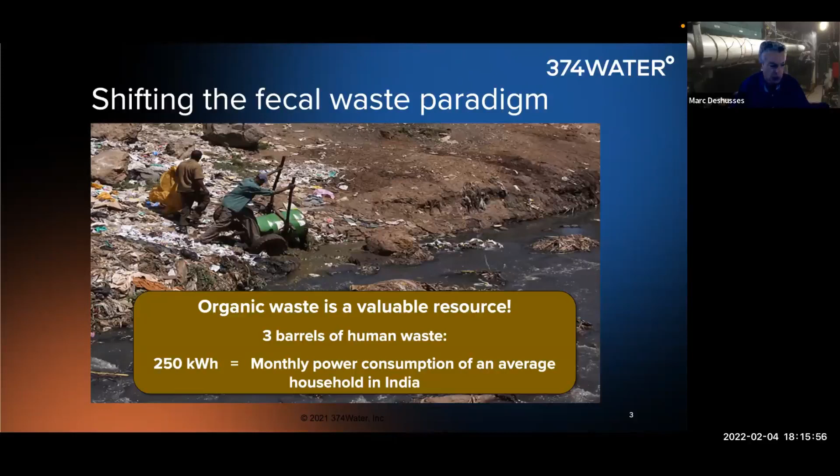Greg, if you go two slides forward, we have here. I'll tell you a little bit about the science, and then show you some of the features of our system, and then focus on global access and what it means.

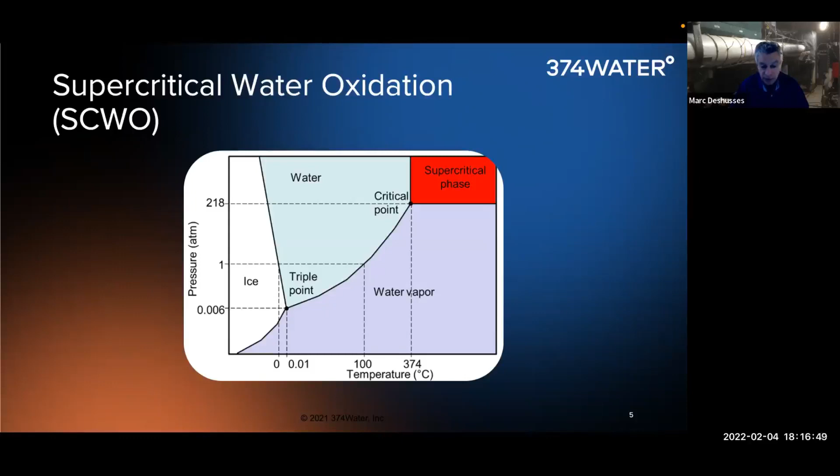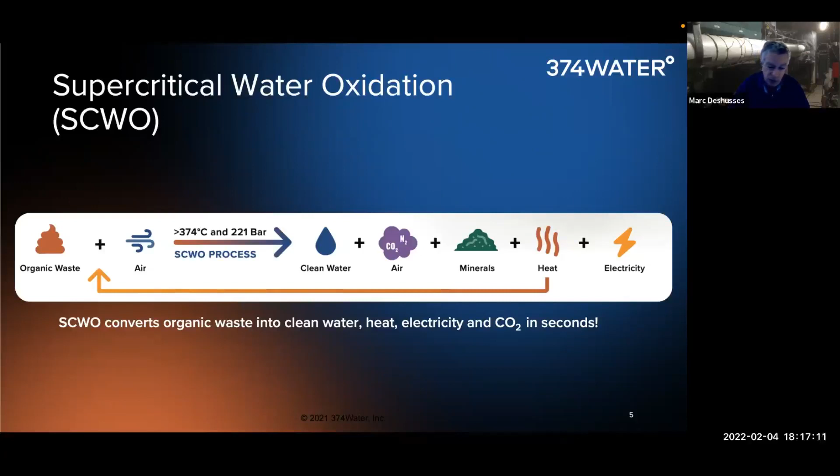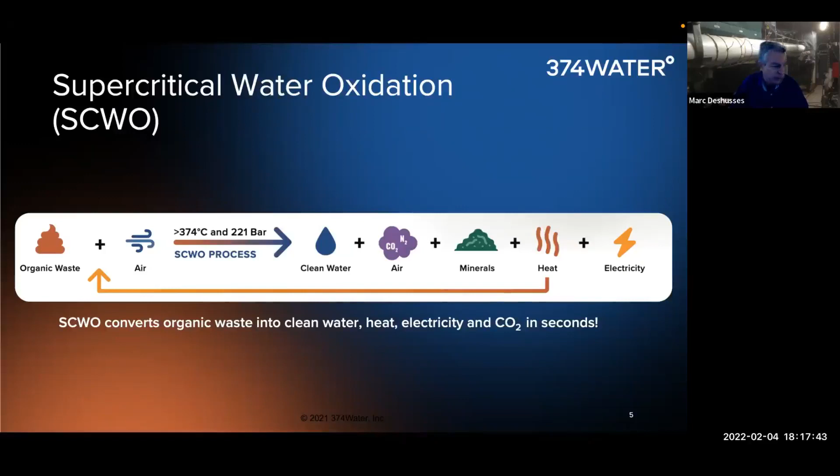So what that means is that when you inject air into organic waste in a slurry that's been brought to supercritical, the following reaction happens: all the organics get oxidized, recovering clean water that can be reused. The carbonaceous materials are converted to CO2. Minerals fall out of solution and are readily available for reuse as fertilizer. Then you recover the heat of reaction, because it's an oxidation, and that energy is generally re-injected into the process to make it continuous. Some of the surplus can be turned into electricity. So that's the gist of the SCWO reaction.

On the next slide is shown how we've engineered it to fit into a box that can take any organic waste, fecal waste, pit latrine content, contaminated water, chemical waste, and others, and turn it into clean water and the elements. If you follow the air, for instance, the ambient air gets compressed into a high pressure compressor, and then it passes through a heat exchanger, the economizer, which recovers the heat of reaction and heats up the air to high temperature.

It's then mixed at the entrance of the reactor with the waste undergoing treatment, and that waste is slightly preheated for energy efficiency in another heat recovery system. In the reactor, the reaction that I was showing earlier occurs, and it happens in a few seconds - we're talking about 4 to 10 seconds for the reaction to occur, and it's extremely fast because of the conditions I mentioned earlier. Then the heat is recovered.

After the heat exchanger, we have a phase separation. This is where the permanent gases and some vapors are expanded in a heat recovery and energy recovery system, resulting in power used in the system, the vented gas, and distilled water quality. Here the water is condensed and is of very high quality.

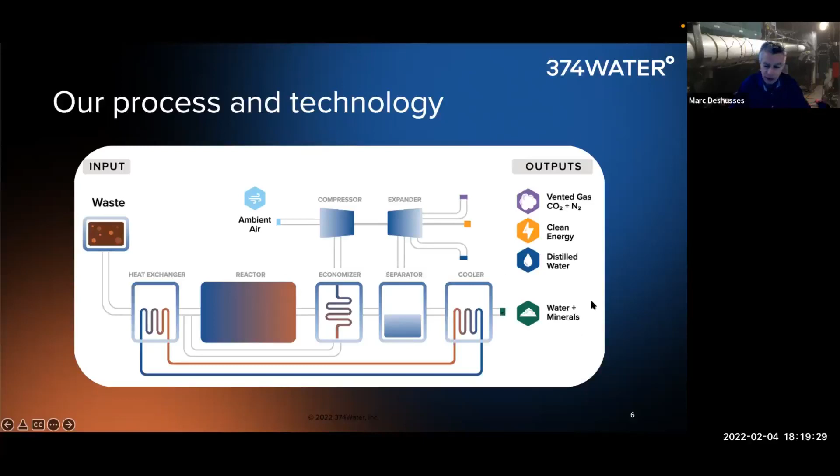The other stream from the separator is the minerals I was mentioning earlier, along with some water, and that's fit for recovery. On the next slide, you see a picture of what we call the Nix One System.

This is the original prototype built with funding from the Gates Foundation. We received funding to demonstrate this technology, to de-risk it, and bring it to a stage where it can be commercialized—about $5 million from the Gates Foundation, and about $1 million from other agencies. The characteristics of this system are that it's very compact.

This is a 20-foot container that can treat the waste of 1,000 people, one wet ton per day. It's a continuous process and produces clean water. We'll show you some pictures or videos later. There's no odor with water, wastewater, or fecal sludge.

Odor is a big concern, but there's none here, so you can place a unit like that in a neighborhood. It also destroys all organic chemicals. There are no organics that we've fed to the system that haven't been destroyed.

Mary mentioned PFAS, PCBs, emerging contaminants—they all get destroyed and mineralized. You can do this with multiple wastes mixed together, like fecal waste plus chemical waste. Everything is disinfected because of the heat, and you can do it with waste without dewatering or drying.

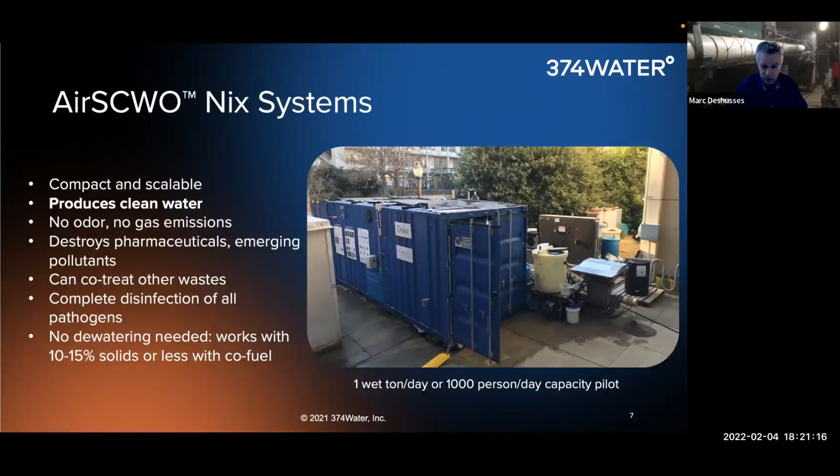On the next slides, you see more pictures of the system and its interior—it's all industrial equipment. Some further attributes: the units are small, and you can locate them on the premises, embedding them at the source.

By the way, my background is inside the unit as well. The pictures you see here are from before the thermal insulation was placed.

Very relevant for the audience today is to realize that we recover and can reuse water. We can treat fecal waste, as mentioned, but also recover energy from it.

We recover nutrients too. In today's context, India is going through a huge revolution initiated by the Swachh Bharat mission, along with stringent requirements placed on wastewater treatment. There's huge demand for toilets and for small scale systems, and we think this solution has a role to play in decentralized units.

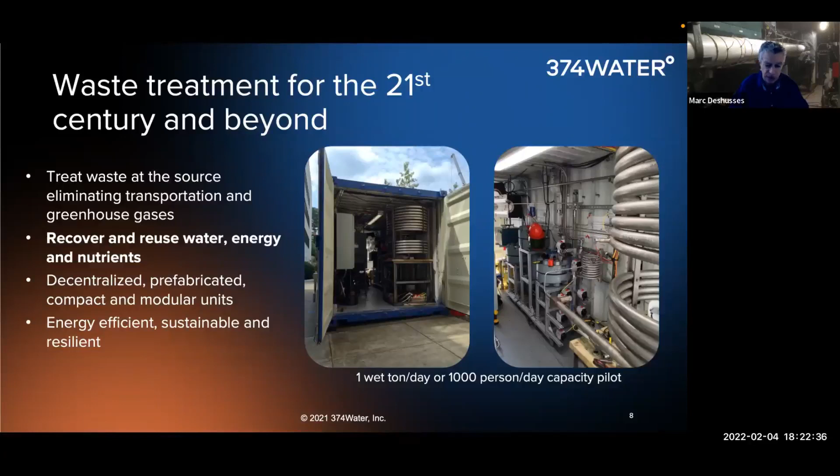The process is very scalable, so it can fit multiple needs, and it's very energy efficient. As we started talking about sustainability, Doug mentioned the sustainable development goals—I think this is very relevant to that.

Next slide, please. In the video, we'll show the ability of the unit to treat a variety of waste. We've done a lot of work on biosolids and fecal sludge, but this particular video shows us adding microplastics just to demonstrate that we can treat ground plastics.

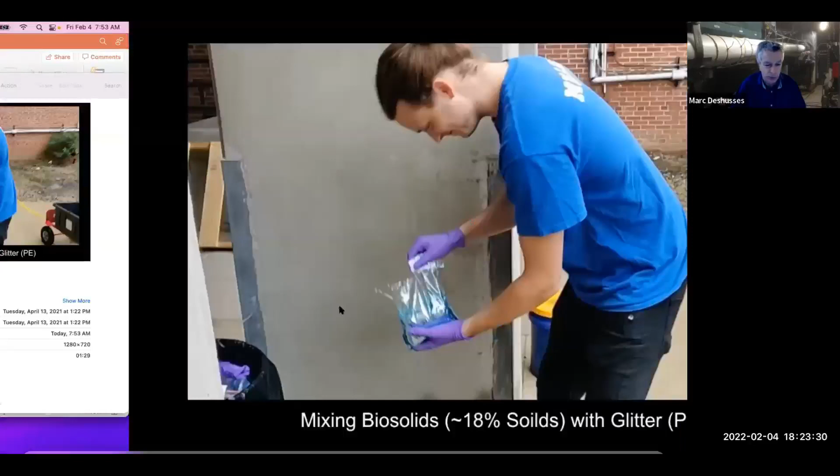We can also treat waste oil—that's the gist of this video. I'm going to take away the music in the background. So what we have here is biosolids at the bottom, and then we're adding plastic.

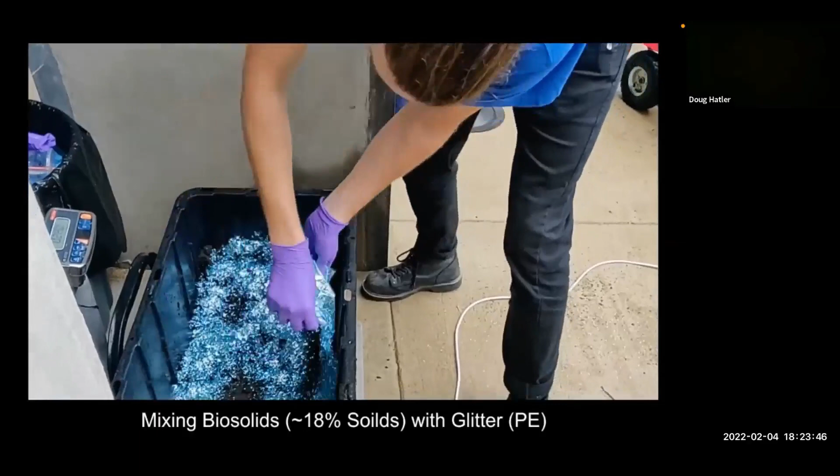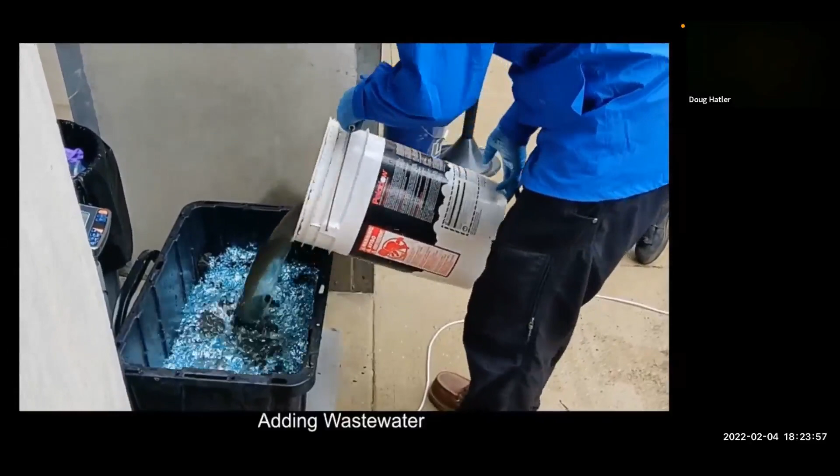The plastic isn't a necessary feedstock—it's just added to demonstrate a blended waste of biosolids and wastewater, representing microplastics. So we're showing that we can treat plastics, and then we're going to add some fats, oils, and greases.

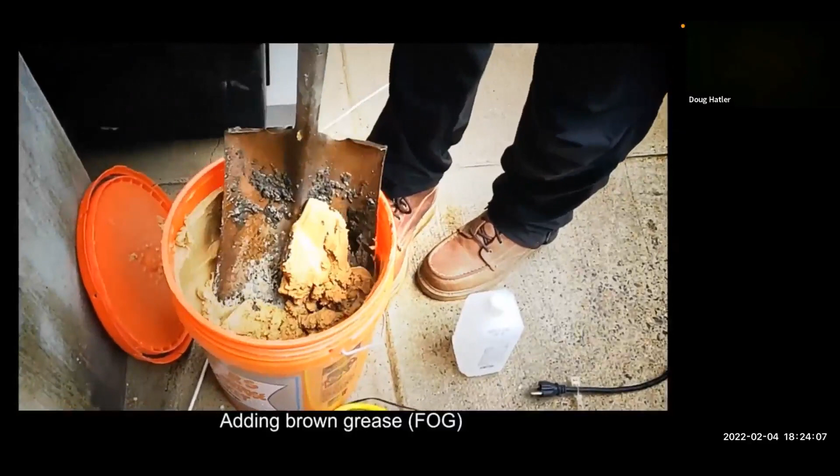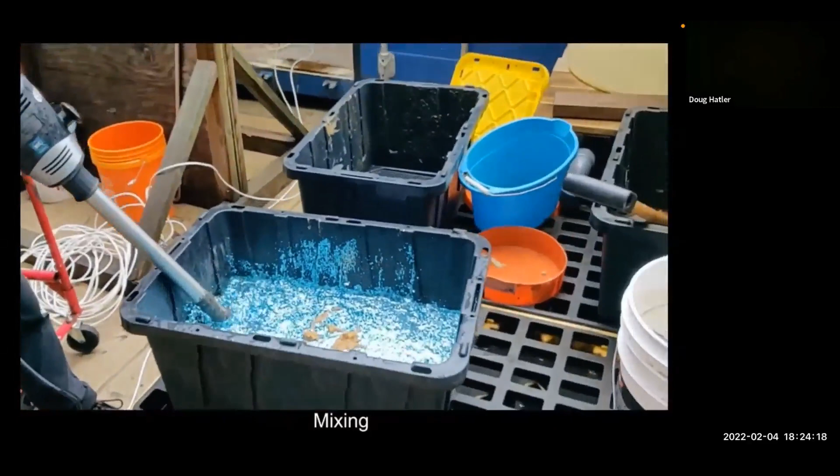This is why we have cholesterol treatment medications in the world. That's going to go into the Nyx One—this is at Duke University, a pilot system that 374 Water uses under a sponsored research agreement for treatability testing.

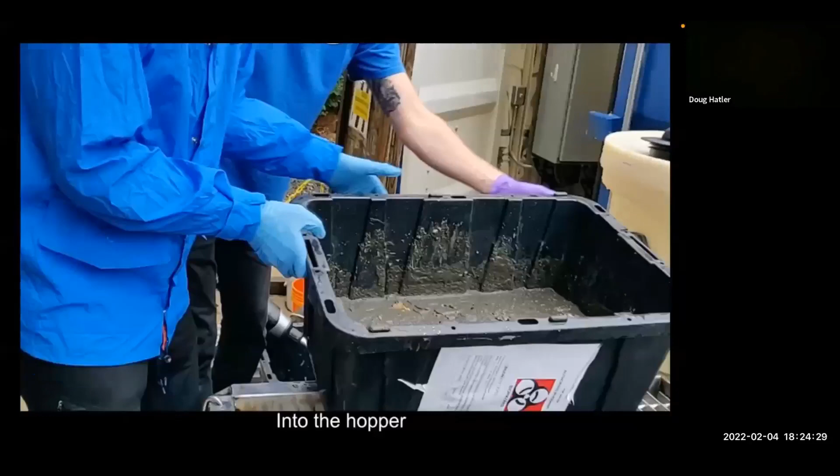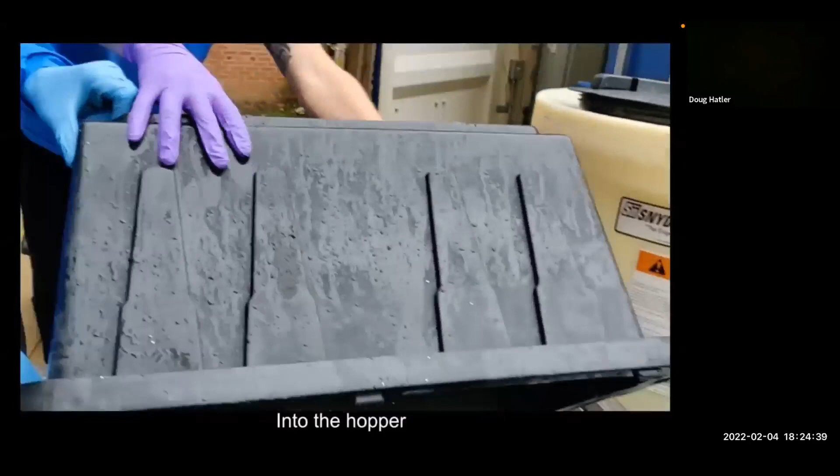What they're doing here is making a uniform, consistent feedstock that's about 12 to 15% total solids. They're pouring it into a feed hopper, where it will go from a low pressure pump into a high pressure piston displacement pump, which then moves it through the reactor—that's the actual material going into the system itself.

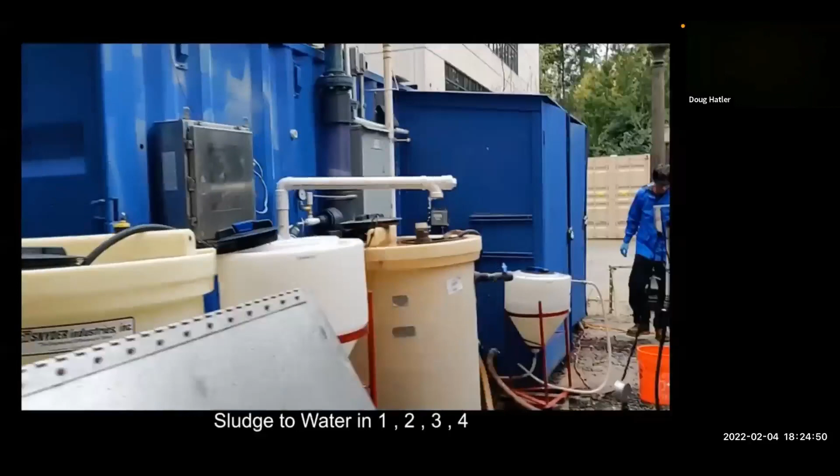What you're going to see is the Nix 1, the blue container—a 20-foot cargo container. And voila, that's what comes out, minus the gases that are released, but that's it.

All those solids, 99.9 or higher percent removal of volatile solids. COD reduction goes from 160,000 parts per million or 220,000 parts per million down to about 118 parts per million.

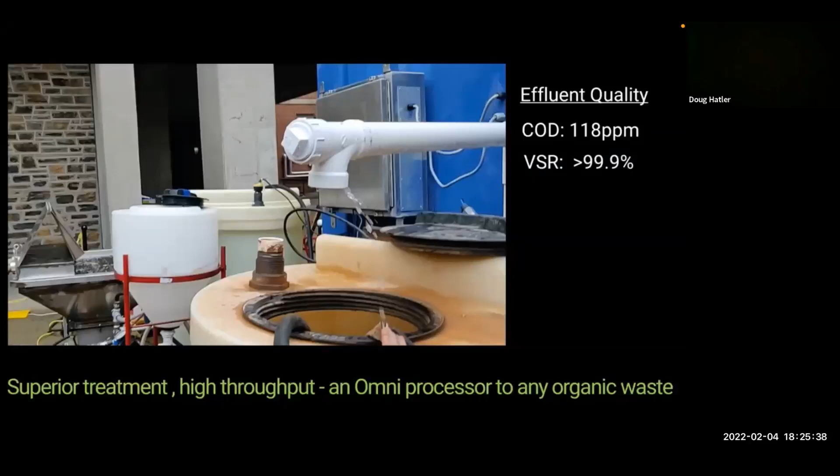Any organics that might be in there, microplastics, drugs, if you did have PFAS, anything else that's in there is generally going to be mineralized to CO2 and H2O. Any inorganics there are going to be oxidized to the highest oxidation state of whatever else is in there. They may form precipitates with other compounds, or they may just be in an ionic state, but that's it. So that's the idea behind our solution.

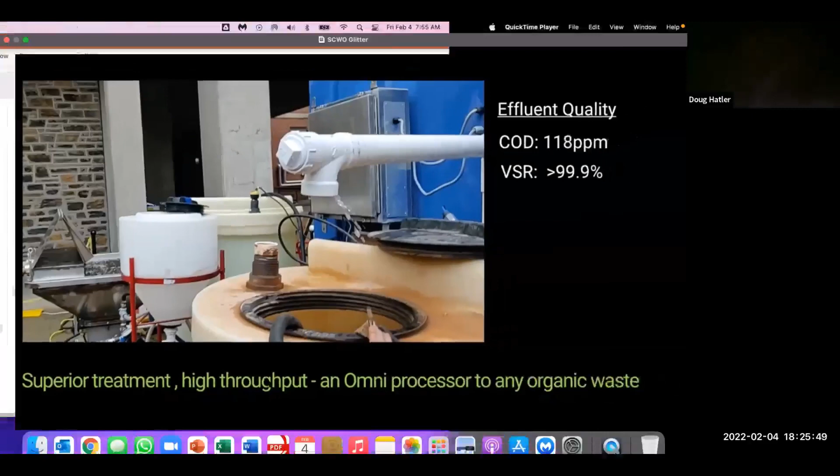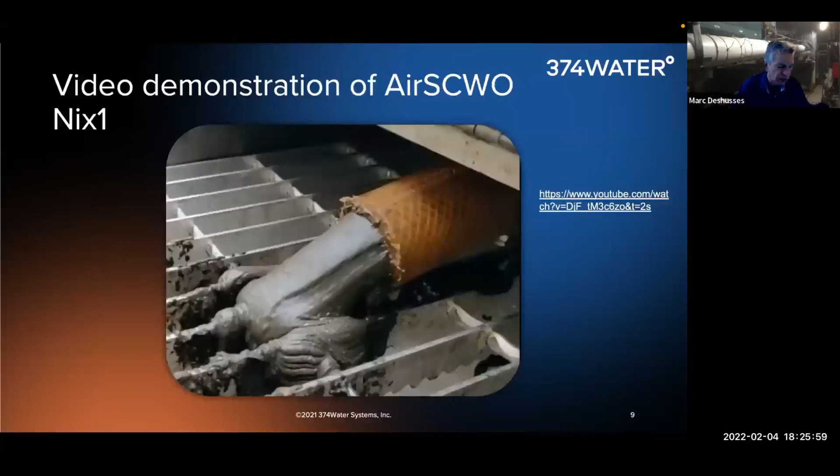So now what I'm going to do is go back to the slide presentation. I think at this point, why don't we stop, Marc, and see where we are. Yeah, let's stop and take a question if there's any about the technology. Let's get to the next slide, next two slides, and then we can take questions.

Great, get on the slide that shows the minerals right after the video. Is this what you want to show? Here's more, just again showing the diversity of things that go in and how clean what comes out is. You see a picture of the minerals, and those contain all the phosphorus.

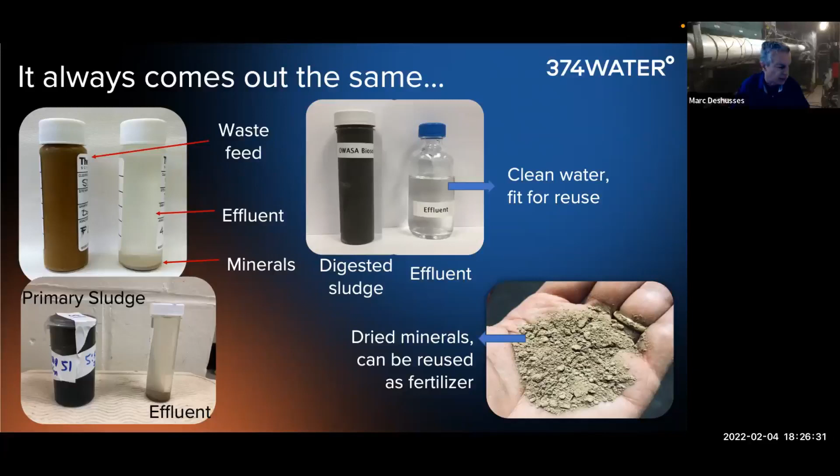Also, on the next slide, you have some attributes of the water effluent. We're coming in with very high concentrations, that's the feature required for energy efficiency, either as COD or as a solids content, very high nitrogen, phosphorus, and then what comes out is the water, very clean.

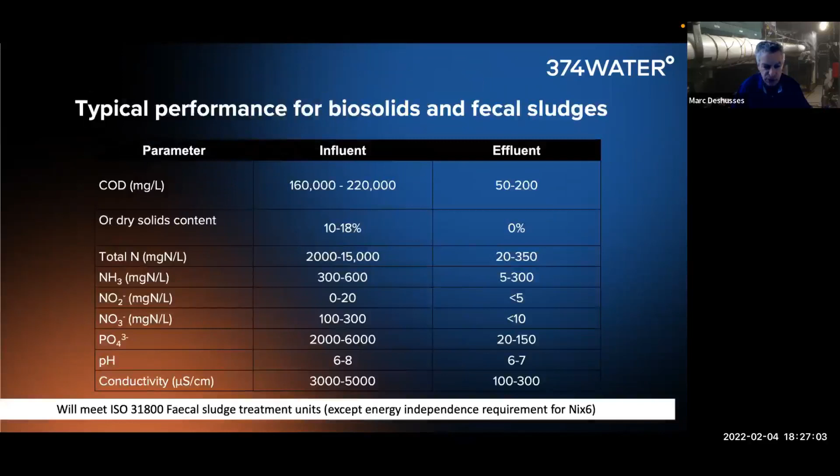Maybe indeed, as Doug said, before we get into telling you about our global access program and our plans, let's take questions on the tech. Yeah, so we'll close out the tech and open it up.

Right now, what you'll see over there in the dotted line is the Nix 1 unit, which is the pilot system that sits at Duke University. We at 374 Water are currently in the process of manufacturing two Nix 6 units. Those are 6 wet tons per day, approximately 6,000 human individuals population. The first unit is going to Orange County Sanitation District in Fountain Valley, California for a demonstration project.

They will be treating primary sludge mixed with concentrated thickened sludge. We will be putting that combined material, which has about a 4 to 7% total solids content, through a dewatering unit where we will put it through a screw press, and then thicken it up to about 12 to 15%, and then it'll go through the Nix 6 system, where we will treat it with the AirSCWO process.

What will come out will be what we talked about earlier. We'll have a water stream that's distilled water. Some of that distilled water will be reused in cooling and providing water into some of the equipment. What's left will be mixed with the water and mineral solution that comes out of the reactor itself. We'll be sampling the minerals to see what the mineral content is, to determine if we can valorize the minerals, as Marc said, as a fertilizer.

Then we are at the drawing boards right now on our Nix 30 unit, which is a 5 times scale up, so that's 30 wet tons per day. That would correspond to the solids from about an 8 to 10 million gallon per day plant. And then there's a Nix 200, which is 200 wet tons per day, which would take you up to about a 30 million gallon per day wastewater treatment plant, or the solids from the equivalent.

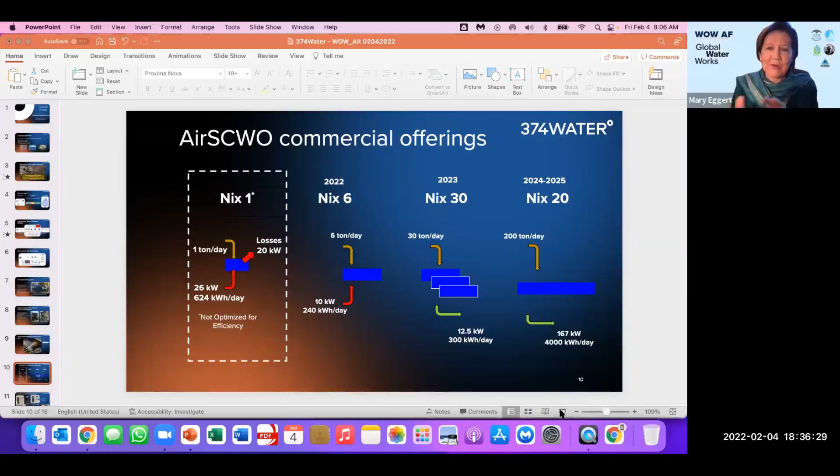It's so interesting to look at the many different revenue streams and the ways to cost-benefit this, because you have the transport and tanking of solids off of a property, and you mentioned the number of tons — but have you planned, or how, when you talk about generating revenue from some of these minerals, or a polishing process to extract things that could be useful, I know that creates revenue streams. Are you involved, or how does the utility capture those revenues?

Doug, if you could talk about your vision right now.

So what we're going to do in the OC San project, and what we're doing with many of the projects, is what we call controlled studies. Because we're moving this into a 6x scale-up and out into commercial application, we want to understand what the feedstocks are, what the effluent is, the concentration and composition of the feedstock and the effluent, including what the minerals are.

And we will also be sampling off-gases, because in the US we have to satisfy regulators that this does or does not need an air permit, and if it does, what are the parameters that might be of concern. So we're working with a consulting engineering firm as a partner, and they're going to be doing the monitoring.

One of the things we did do is put in a translucent cone-bottom tank for the effluent, so we can put the waste in there and pull mineral samples. Depending on what's in there, we'll be able to look — we've talked with a couple of universities doing work on recovery of minerals like this. So we do want to see if those streams can be valorized.

And then in terms of the water that comes out, it can be used back in the plant. Depending on the use, that will determine what polishing you might need. Unfortunately in the US water is too cheap, but there's still an operational cost offset if you're able to reuse and recycle the water.

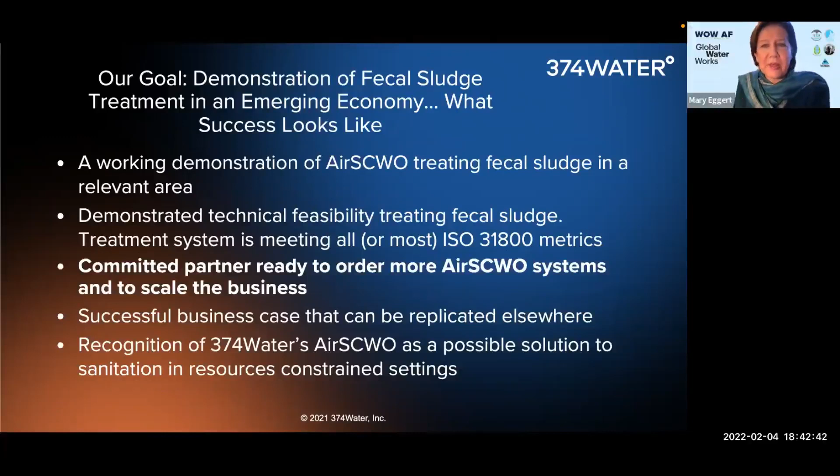Is it necessary to achieve drinking water quality? What would be the impact on technology? And I think the guys discussed this in terms of the energy cost. If one is looking at treating to discharge standards, maybe Marc, you could answer that.

Yeah, I'll take that. So we meet the most discharge standards, from a COD, organic nitrogen standpoint. I presented that just to highlight it. And on the energy, so you can look at this as we're going to meet the discharge standard. On the energy, this slide's been up for a while. What you see is that the Nix 6 is actually consuming a little bit of power, not much, but with the economies of scale and better equipment available at greater size, greater scale, the Nix 30 can actually run autonomously just on the waste that is embedded, that drum that I was showing at the very beginning of the presentation, and so is the Nix 200. So it's very energy efficient because it was engineered and developed with that intention.

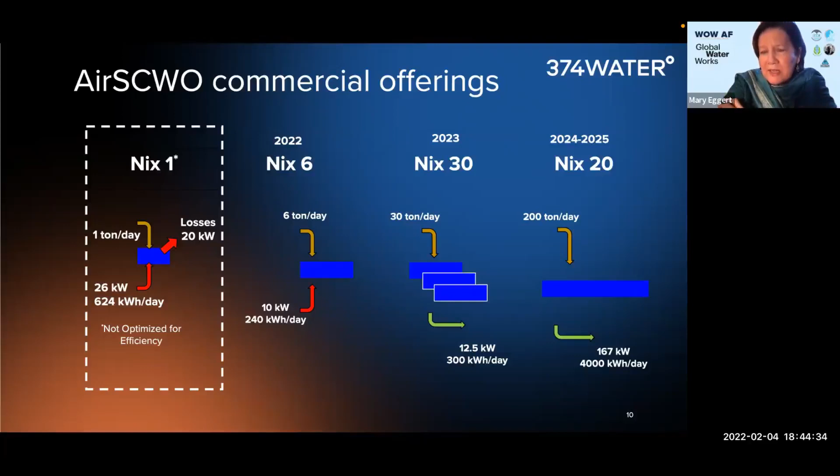Great. And I encountered your team at a zero waste discussion, a place where we were talking about how do we meet these EHS, SDG goals of the UN, and move towards zero waste. I'm thinking about like CAFOs or those very large farm operations, or places where they are limited in what they can discharge in order to add a new plant or facility. Marc, if you could talk about achieving a vision for zero waste, it seems like that's probably the prime motivator for this supercritical water oxidation. Is there a CAFO or a commercial entity that you had in mind as the ideal purchaser that would want to cap the waste element of their operations?

There are many, for those who are not aware of what CAFOs are—confined animal feeding operations. A lot of industrial farms in the US are like that. Animal farms are prime targets, and so are many other applications we're pursuing, because they don't flush the toilets at animal farms as often, so the waste already comes in more concentrated ways. But it's a complex market as well.

Doug mentioned some of the markets we're targeting: chemical waste, fecal sludge, biosolids. There are many applications. One big one currently in the US is the market of emerging contaminants driven by fluorinated compounds called PFAS. We know there are many pollution aspects as well in India, in surface and groundwater. So this is a quick answer to your question.

As we move into this discussion of application and potential fit within India, let me ask one last time: is there any more technology or understanding of our AirSCWO or anything else about the actual units themselves? Because as we move into Mark's discussion about the Global Access Program, you'll be able to provide us valuable feedback on whether we're satisfying a true need in a way that can reach your markets, or whether we need to adjust our trajectory.

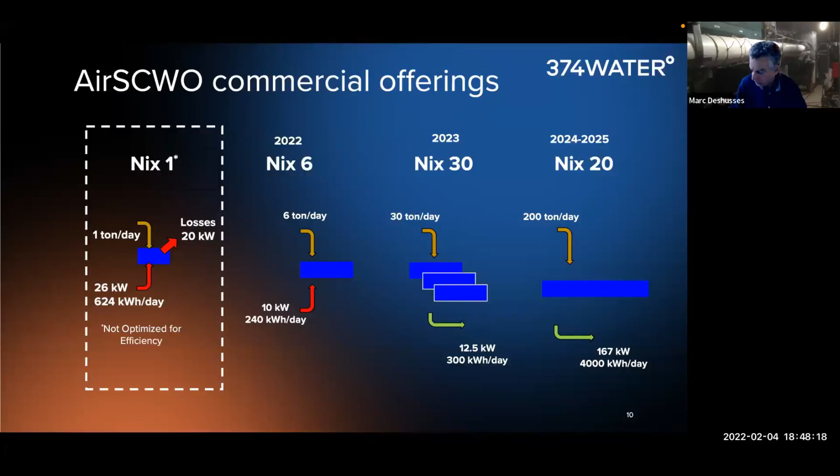Yeah, so when you talk about the Nix 6, the 6-ton-per-day unit, most of the equipment is inside a 40-foot cargo container, and then there's some ancillary equipment that expands the footprint a little bit. But you're talking, I think we've estimated, anywhere from 1,000 to 1,200 square feet. And I'm sorry I'm using US units—it's been a while since I've done international business, so I've gotten rusty on making quick conversions in my head. Oh no, that's perfectly okay. Yeah, so it is a relatively small footprint.

So from a cost standpoint, the manufacturer's suggested retail price—and this is not necessarily the final price—but a capital purchase price is roughly 2.4 million for the Nix 6 and roughly about 5 million for the Nix 30. We estimate the operations and maintenance costs to be about 5% of the capital cost per year. That assumes about 1 full-time equivalent, and includes the cost of electricity for startup, shutdown, and operation, parts, and normal maintenance of the system.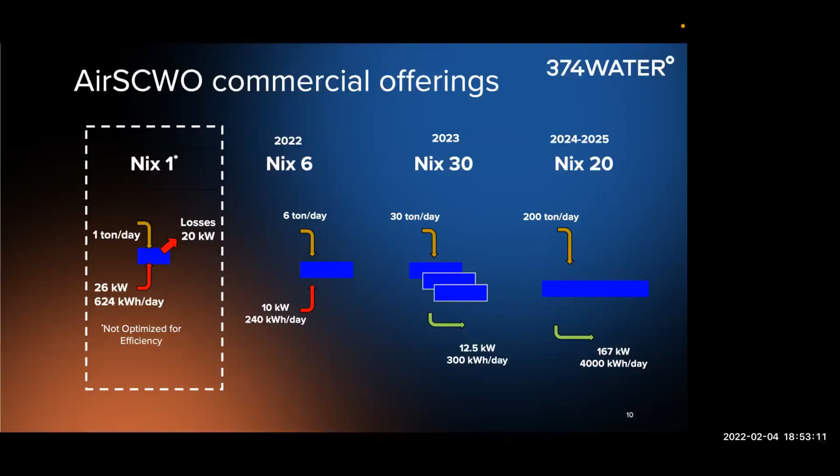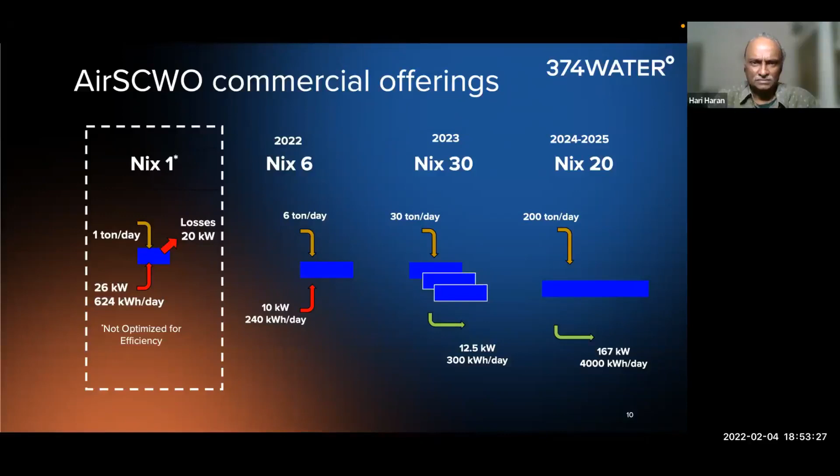So tell us, is that a lot, is that a significant cost for this, based on the lens through India? Sanjay or Chandra, one of you. Swaminathan had some comments on this too. Let me first respond. The question he's asking, being very transparent, is: he's saying, look, I don't understand what your economic scenarios are in India. If you can give me an idea of the prices, we are willing to see what we can do to look at it and recalibrate ourselves. In effect, that's what Doug was saying.

Recently, we have started discussions with the public utility services in Hyderabad to manage fecal sludge flowing, to stop it flowing into the Musi River, which is highly polluted at the moment. We are probably having another meeting with them coming week. But everything, sir, as you know, in India the pricing cost, it's a very cost sensitive market, so we'll have to really work out the commercials and the social benefits to see the viability of its applications in India.

More so, it should be where the quantities are large. Maybe we can get better output, because local technologies, we talk in terms of maybe a few thousand dollars for a 10 to 20 KLD sewage treatment plant. That's how it works out. So definitely, but this system on a larger scale, if it can help save our water bodies, which is a major issue in India, we would definitely like to work out on that.

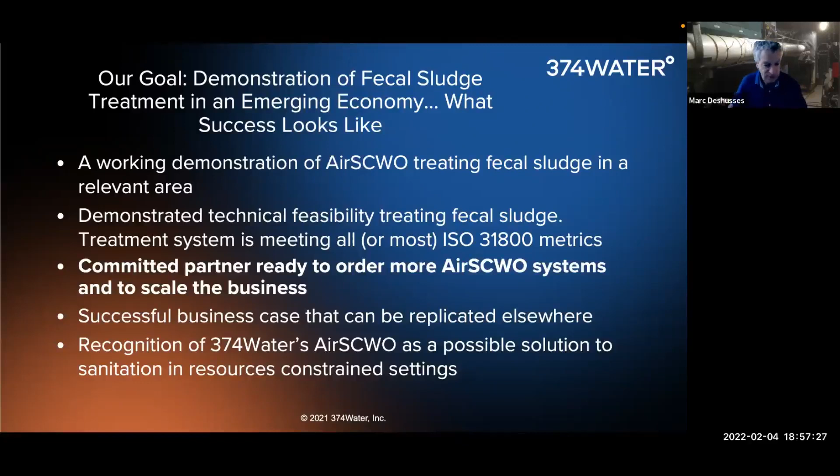So on the next slide, just a little bit showing you what the master plan is. Doug, if you could advance to the next slide. Doug, can you switch to the next slide? Okay, Marc, are you looking for me to advance? Yeah, next slide please.

That's an overview of our plan for this demonstration, working with a partner in India or another emerging economy who has the credentials, the guts, and the vision to work with us to put a unit and develop it into a fruitful business, so that we can do good for society and they can be a profitable business.

So that's the selection of the commercial partner, which is on the left. There's no question we'll need to work with government and have a tight, friendly and fruitful relationship in advocacy with government. We will need funding, and we're well positioned. We have started pitching, and we have great connections with the Gates Foundation, but also with the World Bank and others. We're looking to launch this demonstration soon.

For a duration of about 2 to 3 years, because it will take time to put the unit on the premises, but also train the partners and local operators, and then build a model that can go to scale. Certainly cost is an issue, but there are cultural aspects as well, and technical demonstration. So that's, in a nutshell, the overview of our plan.

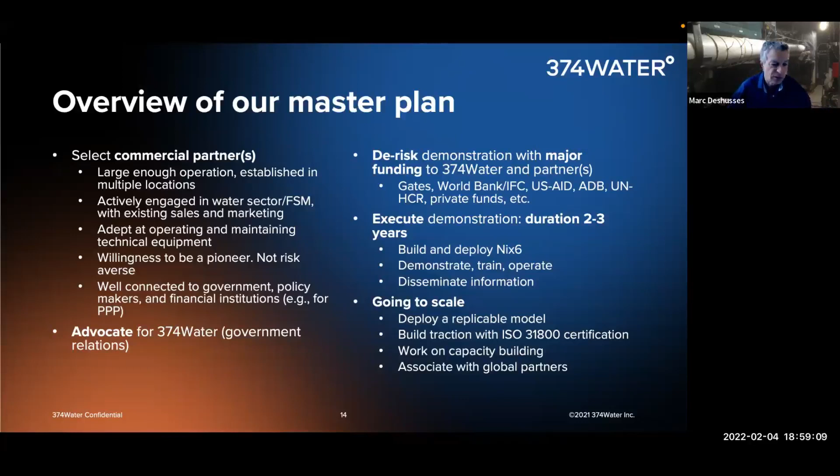Again, I want to put out a call here for those of you who recognize yourselves as a potential partner in any capacity to reach out to us. And with that, I will...

Marc, I'd like to also mention that we have had some contact from some industrial entities in India. We are in conversations with Aarti Industries for some of their industrial wastes and wastewaters. We've also talked with Dr. Reddy. So we have had some inquiries from some industrial corporate entities within India that we're having discussions with.

So we have both the private and the public approach. Because whether it's a commercial application or a public WASH application, the key thing is to find partners and establish a presence to see if we can make this work within India. Then we would take that model to other emerging countries as well to provide the same benefits.

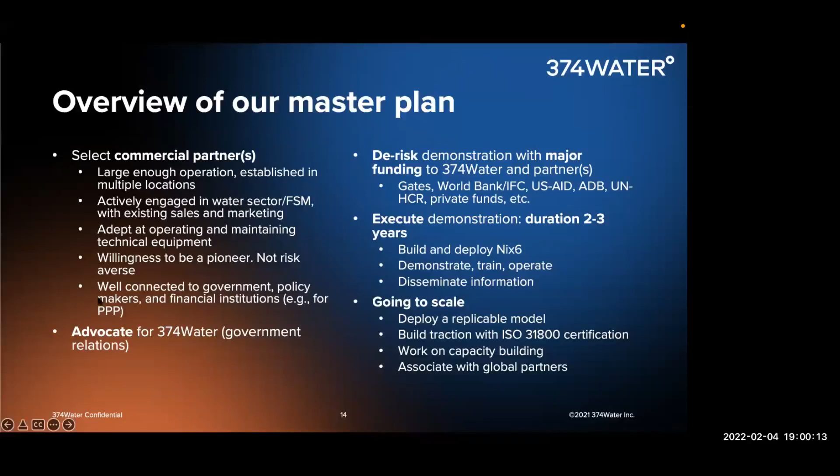Got that, Doug. Rana, you've raised your hand for a while, would you want to speak? We're done, we can finish up with questions at this point. Will you want to speak please? Rana, do you want to speak? You raised your hand. Okay, MD Rana? No? Yeah, he's yes. Yes please, here he is. Can I come in? Yes please. Can I come in? Yes, we can hear you, sir.

Yeah, I'm from Gujarat. Good evening. Good evening, good morning, good afternoon. I have been in difficult water treatment business for almost 10 years now, and in the overall water business for 50 years.

Your model is not meant for water exclusively. It is entirely different - solid waste management along with wet waste. I fully understand the concept. Before joining your session, I had studied a little bit about your product, and I'm keenly interested.

It is a tremendous market in India. The company you mentioned, Aarti, I already know them, in a number of places. Number two, Reddy's I also know very well - I have worked and understood their problems too. We can definitely work with the industrial association, number one, and number two, with the government. Once the technology is in place, we can make sure the government implements this positively.